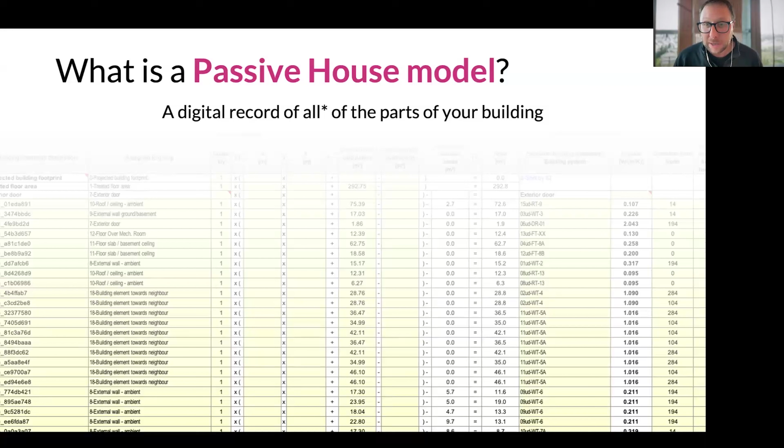So we're making a digital version of the building. We're going to take some real part of the building—a window, a door, a wall, a roof, whatever—and we're going to turn it into a set of numbers. And the reason we do that is so that we can figure out something useful about that thing.

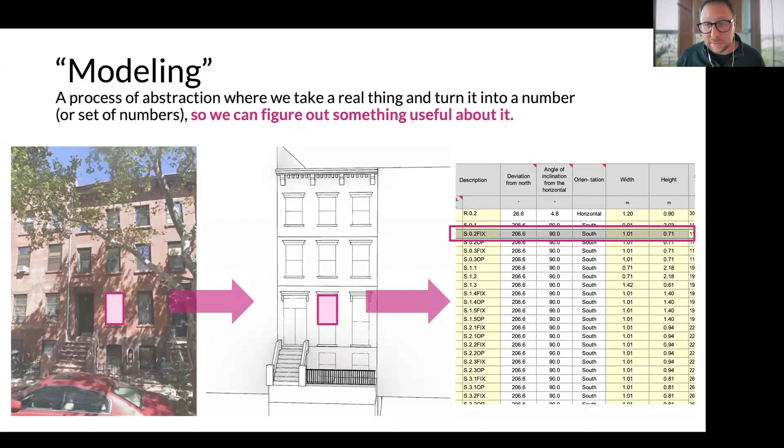So maybe we want to calculate energy performance. Maybe we want to look at thermal comfort. Maybe we want to look at condensation risk. Whatever it is, we're going to use that abstraction to determine something useful, something helpful about the building. And we do that so that we can make decisions. That's why we model these things, that's why we undertake this effort.

So when it comes to passive house modeling, we're talking about a few very specific types of models. In particular, during this talk, I'm going to be referring to what are known within the industry as PHPP and WUFI, or WUFI Passive. These are the two primary energy modeling or certification modeling platforms used in the passive house world.

PHPP stands for the Passive House Planning Package, and WUFI is just another piece of software. PHPP is used by the international certification, and WUFI is used by the US certification. So they're basically the same—they have some small differences, but for the most part, they're going to take in the same set of inputs, the same type of inputs, and yield the same type of outputs. So they're doing the same job functionally.

So what kind of things are we recording in these models?

Remember, when I use the word model, it's really just a recording. It's really just a counting of all the bits and pieces.

We're going to take in all the site information, the climate, the orientation, the shading, all your building's geometry, the size of everything, all the windows and doors, all those products and all their performance attributes, all the different assemblies, constructions, materials, and thermal bridges of your building.

And then, especially in non-residential or multifamily residential, things like usage schedules. When are people in the building? When are people not in the building? How many people are in the building? Things like hot water usage, as well as all the equipment and piping, heating and cooling equipment, ducting, and different elements, and fresh air ventilation systems and all their ducting and bits and pieces.

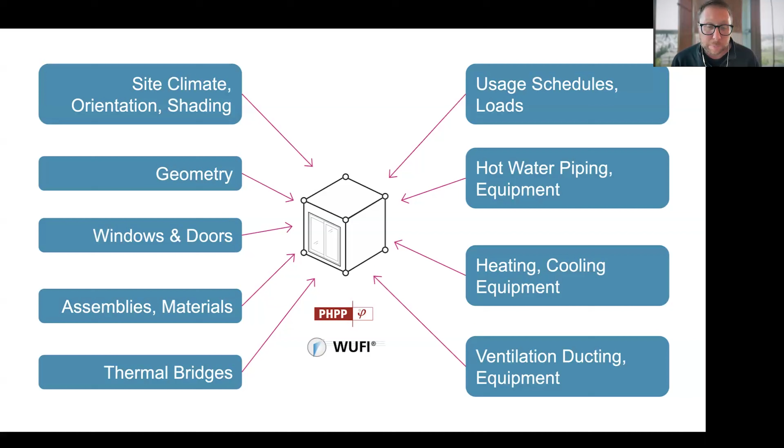There's nothing really magic here. It's really just about taking these real life things, a duct, a window, a door, and turning them into a set of numbers that we can input into these performance calculators, PHPP and WUFI Passive in this particular case.

Why are we doing that? The reason that we model is so that we can determine something useful, so we can answer a question. We don't just model because it's fun to make a digital version of our buildings. We model so that we can figure things out, so that we can determine something about our proposed design.

So we come into our models with a question: what is X? Because we might model for all sorts of different things. We might say, what is the peak load of my building? And I might want to know that so I can buy the right boiler, so I don't undersize it.

I might want to know the predicted thermal comfort of this very glassy room on the corner of my building. That might be an important thing that we would want to learn. We might want to model our buildings for the likely health outcomes of the occupants.

We might alternatively be interested, on the energy side, in things like how much money am I going to spend on energy over the course of a year. Or we might, as we do in Passive House world, be mostly focused on the quantity of energy we're going to use over the course of a year. We might model the kilowatt hours, or if you're in the US, the kBTU per year, the predicted energy consumption of the building.

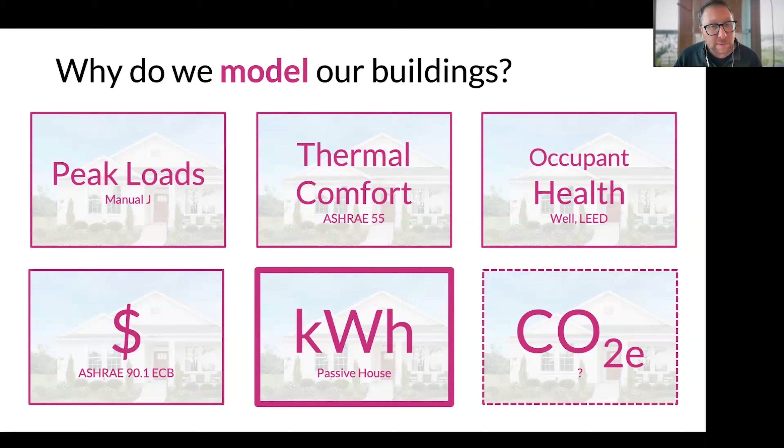Of course there might be all sorts of other things we might be interested in. One of the most common ones we hear from folks now is not so much around energy consumption per se, but moving towards a metric that measures carbon emissions or carbon equivalents, so tons of CO2 equivalent or kilograms of CO2 equivalent. There's all sorts of different things we might be asking our model to tell us about. The reason we want to know these things is so that we can make good decisions as designers and builders.

So specifically, what are our Passive House models telling us about? Our Passive House models are generally used to assess certifiability or certification. And when it comes to Passive House certification, we're going to be looking at primarily three different things: the heating and cooling energy demand.

We're going to be looking at the site energy consumption, which we might look at as a total site energy or a site energy per person. And then lastly, we'd be looking at the source or primary energy. Three different ways of looking at the energy consumption and performance of your building.

We would use these at different phases during construction or design to assess different bits of the building and look at how it's performing. But these three outputs are the key metrics we're looking at when it comes to certifiability in our Passive House models.

So we're going to input a whole bunch of stuff about the building, just recording all the things about it. And then the model or calculator is going to determine these values and tell them to us. Based on those results, we can then go make decisions - we can increase or decrease the insulation, we can change the windows.

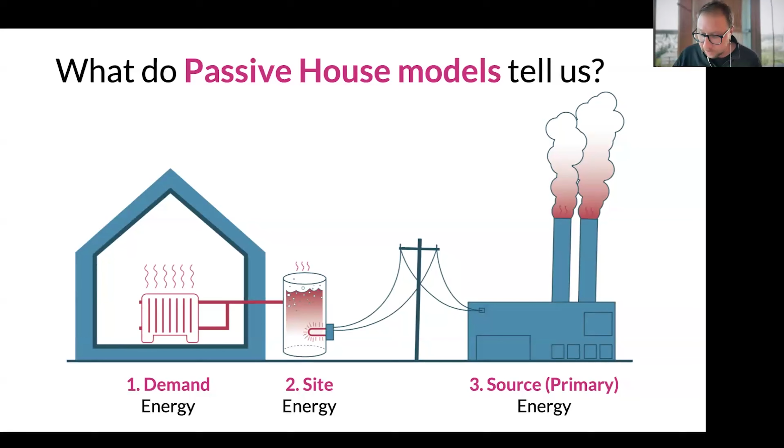We can rotate the building. We can take some design action based on these outcomes. That's the general idea about how these models function.

All right, so we're going to make these passive house models. So who exactly is it that's creating these passive house models?

Well, there's no rule necessarily about who executes or creates the passive house models. They could be made or executed by lots of different people as part of the design team. Maybe the most straightforward agent to create the model is the designer, the building designer themselves. The building designer is going to be the person who has the most knowledge about the project status and the different particulars of the building.

They would be able to iterate very quickly through lots of different options when it comes to the model and integrate the feedback from the model very directly into their design process.

Now, on the downside, the design team already have a lot of other responsibilities when it comes to project execution. On the other hand, they might not have very deep or nuanced knowledge about passive house protocols and rules in particular. The passive house protocols and standards have become much more complicated over the last 10 years than they were, let's say 25, 30 years ago. There's a lot of nuance to the various different rules and requirements, and it's very challenging for somebody who doesn't do it all day, every day, to be knowledgeable and sensitive to all of those nuances. So there's pluses and minuses to having the designer themselves do the work.

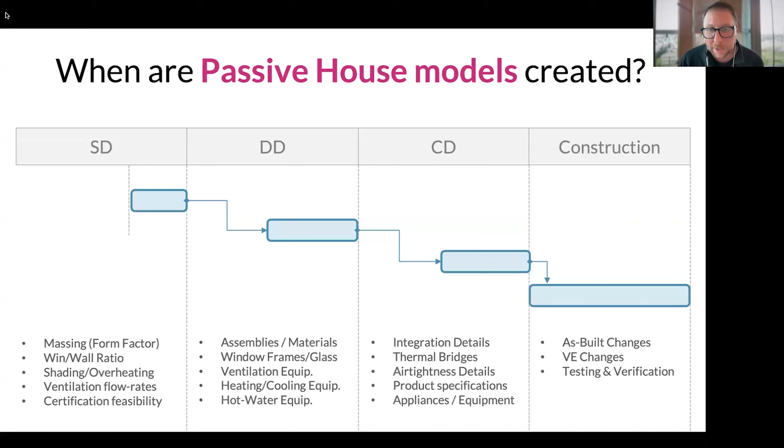One of the challenges when it comes to building these Passive House models is being able to execute early-phase models before all of the project specifications and details have been defined. It can often be very, very challenging. We'll talk about that in a bit.

So the conceit of this presentation was around how to maximize the value of these models. If you're doing a Passive House project, especially a certified one, you're going to be creating one of these models—a PHPP or a WUFI Passive model—you're going to have to do that for certification. But as I said, what we're seeing is that a lot of folks are spending a lot of time building these models. They're incredibly laborious and very difficult to create, but we're not getting enough out of them. We're not getting enough value from those models.

I'm going to define value in this case as the useful output over the effort input. And I'm going to define useful in this scenario as information or output that has a meaningful impact on the design of the building, and hence on the performance of the final building. So we want to increase the usefulness while decreasing the effort, and that will increase the overall model value. We'll talk a little bit about how I think we can do that—how can we increase usefulness, how can we reduce effort, how can we therefore increase the value of these models?

But first of all, who cares? Why does it matter? Why do we need to increase the value of these models? Why isn't good enough good enough? Well, from the design side, we need to improve our buildings' performance as a sector much more quickly, much more rapidly. We are currently far behind when it comes to achieving our climate goals in the building sector. We need to move much more rapidly, and we need actionable, accurate, useful information about our designs in order to be able to move quickly like that at scale.

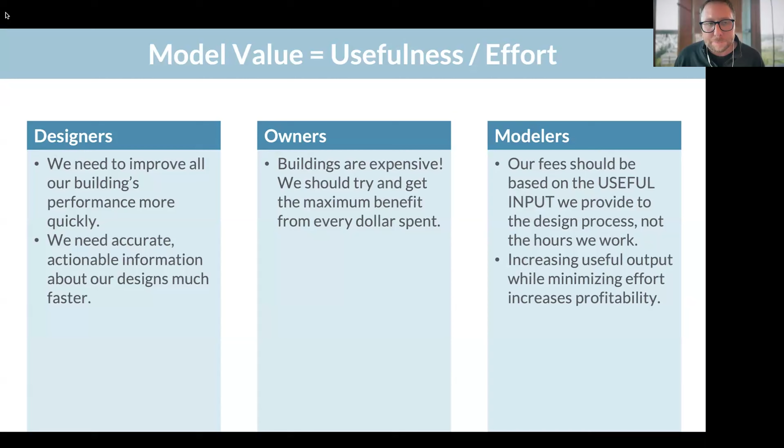Now, one thing I believe is also that model value is not a static value. It's not a single number. I actually think that the model value changes over time throughout the project. So rather than talking about model value as a single thing, we could talk about model value at any point in time along the sweep of the project - during the early stages, during the late stages, during the design phase, during the certification phase, what have you.

What we see in practice and in our own projects very commonly is that the model usefulness - and I'm defining usefulness here as yielding information that helps make the project better, not a very sophisticated definition, but like how useful is the model in making better buildings - that really peaks in the early stages of a project. So the usefulness, the utility of the model, the impact of the model, is greatest at the early stages.

And then it peters off to almost nothing towards the end. That's really just a function of how many decisions are made - not the model per se - but during the construction phase, most everything is decided. You have very few things left to change or revise. So no matter what the model says, it's not going to be able to drive too much. Of course, it's still important and does yield useful results, but there's just so few things to impact at the later stages that it becomes difficult. So the usefulness of the model sort of peaks early and then falls off.

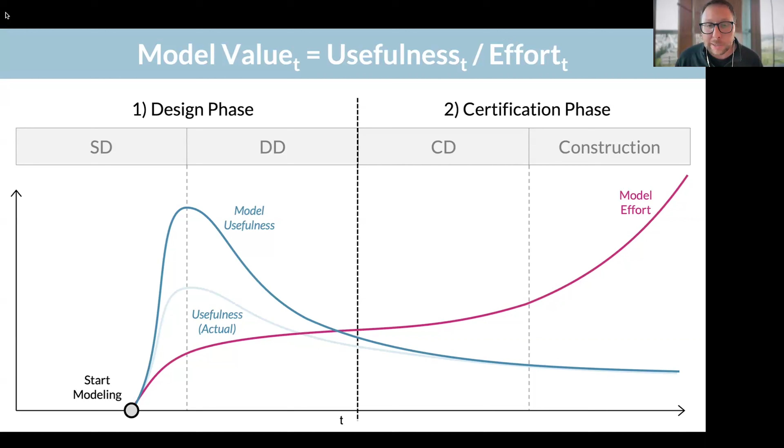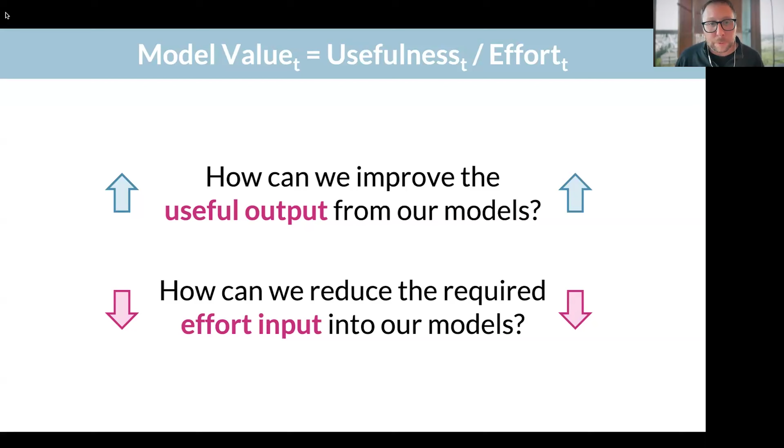So the question becomes, over the whole sweep of the project, how do we increase the useful output of all this modeling? We have to do this modeling for certification anyway, so how do we increase the impact on our buildings, and how do we reduce the effort required? Those two things together improve the overall value we get from the modeling process.

The first way I think we can increase usefulness - we'll talk about reducing effort in a minute - is by spending more time and focusing more energy on the early phase. Judging by that graph we showed before, model usefulness and utility really peaks at late SD, early DD phase. Moving more of our work into that part of the timeline will yield more useful results or impact on our building.

The difficulty, though, is that it's really hard to model useful performance models during this phase of a project. It's not hard because it requires a lot of hours - it actually doesn't take much time - but it requires a tremendous amount of experience and judgment. That's because during this phase, you have no idea what the project actually is.

None of the systems are defined, none of the walls or assemblies are defined, none of the products are specified. So you need to make good, sensible, conservative judgments and move forward, yielding useful information back to the design team even in the absence of that information. That's very difficult - not because it requires a lot of hours, but because it requires a lot of judgment, and much more experienced practitioners.

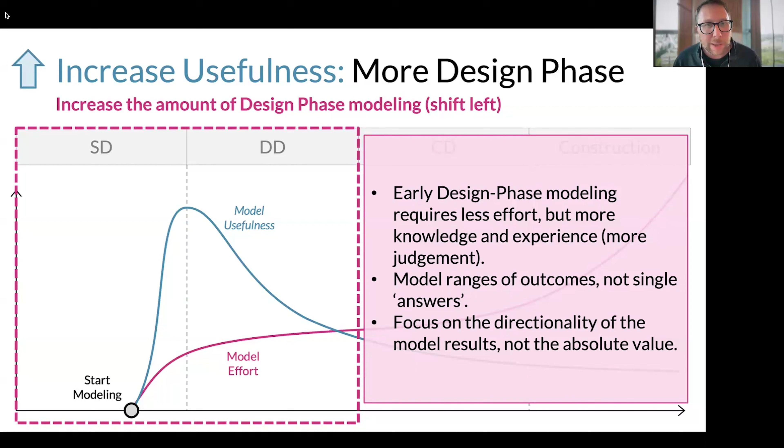But if we can move more of our work into this phase, we can radically increase the value of our modeling work. One thing we can do to increase overall value is, especially during this early design phase, never, ever be modeling just one version of your building. You should always be modeling a range of outcomes.

You should be modeling: here's the building if we built it to code minimum standards of insulation, airtightness, and mechanical systems. Here's the building if we added a little insulation and electrified all the systems. Here's the building if we improved airtightness and added an ERV. Here's the building if we added passive house windows.

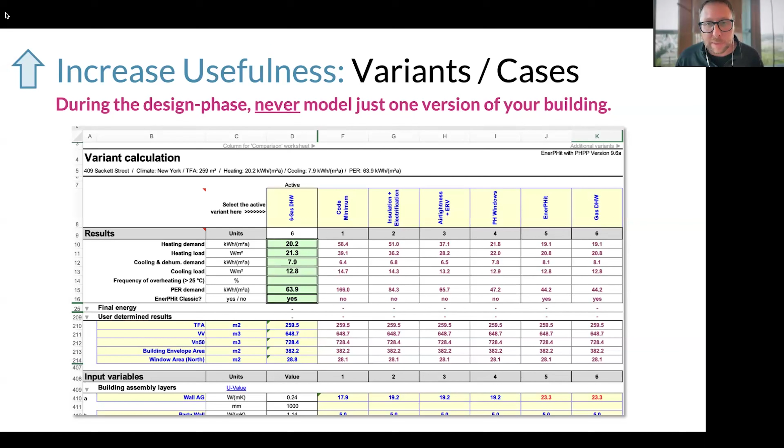Here's the building meeting a full EnerPHit or PHIUS Revive threshold target. So you're modeling a whole range of outcomes, and that range gives you a sensitivity around which elements are really impacting that particular building. It's going to differ for small versus big buildings, hot versus cold climates - it depends on the particulars of your building, but you should always look at a range of outcomes, never one option at a time.

So it's always about looking at options. This is an example of how we do that in some of our professional consulting projects - a little row house building in New York City. As a matter of course, during the late SD, early DD phase, we'll output at least 5 different versions of the building, showing tons of CO2 equivalent emissions per year based on different sectors: heating, cooling, domestic hot water.

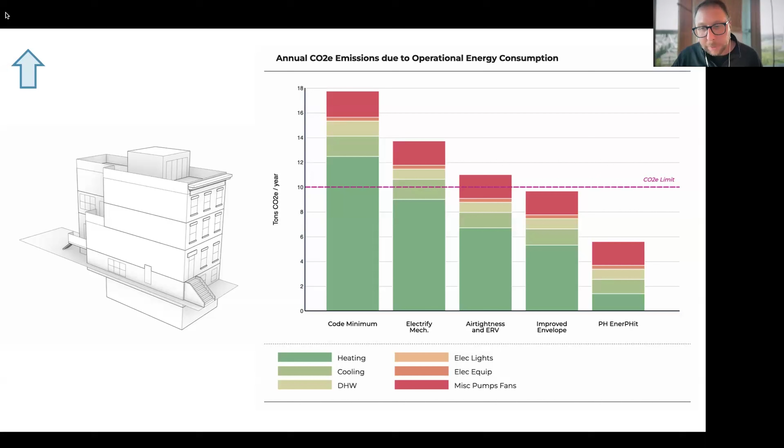You can see we're moving through 5 different versions of the building - in this case, code minimum on the left, and a passive house EnerPHit all the way on the right. We use this as a way to have a conversation with the design team about where the real levers are that impact overall building performance, and where we can leverage those to get the best, most cost-effective building.

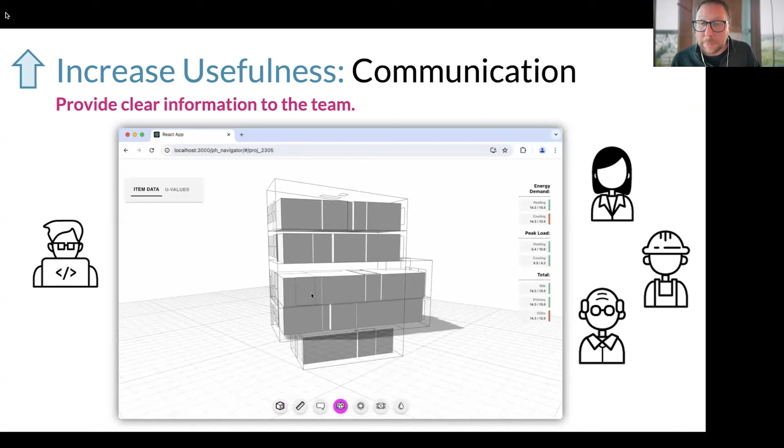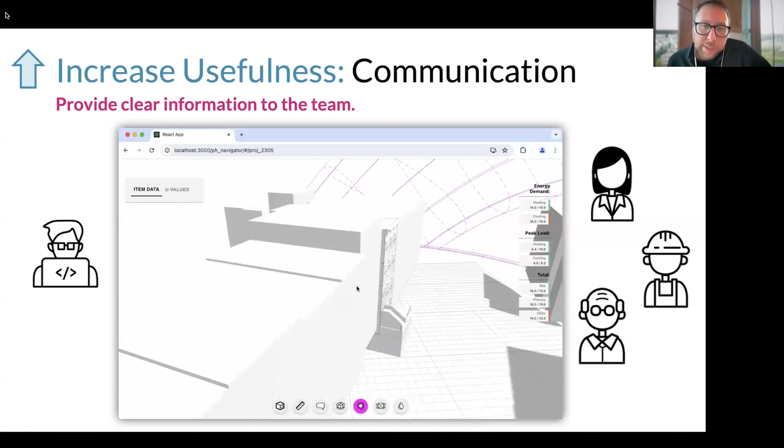One of the other things we need to do a much better job of as an industry, and certainly as a firm, is around communication. How do we communicate all this information to the rest of the design team? How do we keep the entire team in the loop as we're building out these complex building performance models? What you're looking at here is a prototype application we created to visualize passive house models in the web browser.

This is a shareable link that we can provide to the entire design team, allowing the user in their web browser to go in and interact with, query, and look at the various elements of the Passive House building, from windows and walls to rooms to, in this case, plumbing and piping.

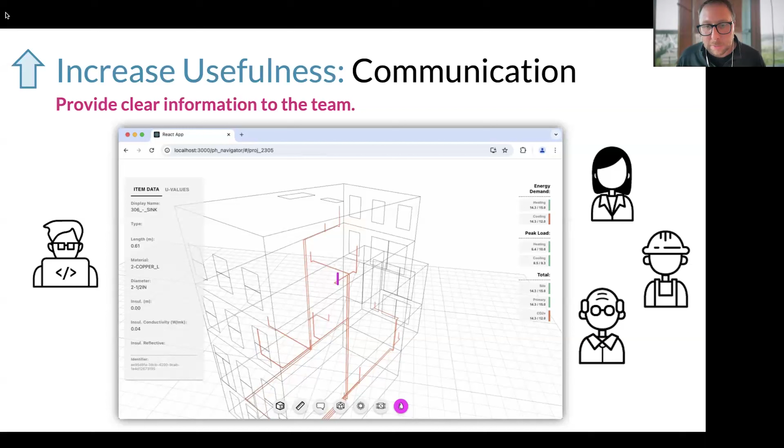This is particularly useful if you're trying to get coordination across the entire design team about what it is that you're modeling. What is the status of the model? What is built in? What is not built in? What are the assumptions? Making sure you're making that transparent to the entire design team, communicating that information rapidly, in essentially near real time.

So working on those communication methods is very important. One of the things we need to work on is how we say things, how we write things. You should never, ever use jargon. You should never say KBTU per square foot per year to somebody. You know the square footage of your client's building—do the math and just say KBTU. You can make everything much easier for the people digesting it. Avoid jargon wherever possible; just say things straightforwardly.

In this case, the bulkhead appears to be unshaded and exposed to high summer radiation—radiation, that's maybe a little jargony, maybe you could say that a little better. But use straightforward, actionable statements to communicate to the design team things you think they should do in order to improve the performance of the building. So work hard on your communication, both on the visual side, the conceptual side, and the writing side. It's very important.

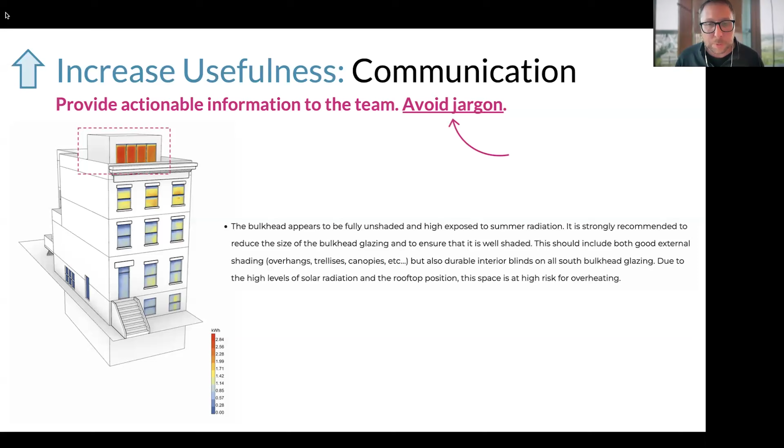Now, on the other side, when we talk about usefulness, that begs the question: who are we? Who is defining useful? Who are these Passive House models useful to? I've sort of taken as a default that we're talking about the design and construction team. The Passive House models have a direct use for the design and construction team.

They help you make decisions—should we build this or should we build that? Should I buy this or should I buy that? That's a very direct use of the Passive House models. So when we talk about usefulness over effort, that's primarily who I'm thinking of when coming up with that equation. But of course, Passive House models—or Passive House certification—have an indirect benefit to other stakeholders that are part of the project team.

Especially the owners, and in particular the residents. The Passive House models can and do have an indirect benefit on those stakeholders.

And then there's a whole other group—we don't want to call them stakeholders necessarily, they're not really part of the project team—but other entities that may benefit from the Passive House certification or modeling. Those might be government or policymakers who benefit from having rich data sets or accurate energy models, academics and researchers who likewise benefit from accurate energy models, maintenance and operations teams who benefit from having digital information models of their buildings, quantity takeoff estimators, and other simulators.

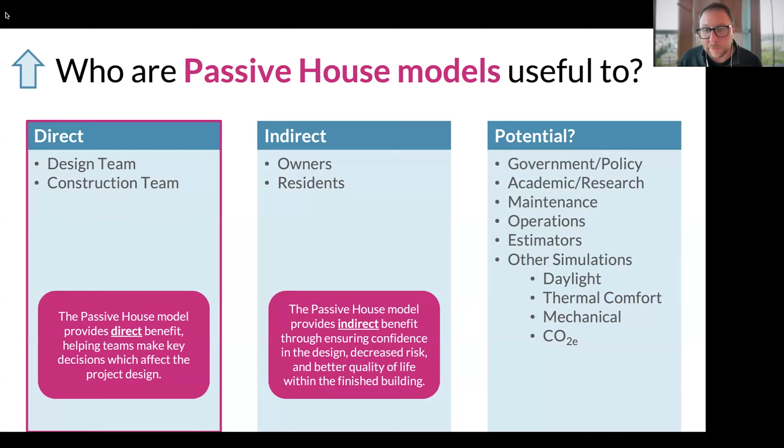If you're working on big projects required to do LEED certification, can you double up the usefulness of your building model to do your daylighting assessment, mechanical assessment for peak loads? Are there other ways you can increase the use of these models you are creating? If we're able to do that, or figure out some additional uses for those models, especially towards the tail end, we could potentially bend the usefulness curve to gain more use, especially in the later stages.

And if we go back to my proposition that as modelers, as design teams, we should be paid for the value we create, not the hours we work, then increasing the value towards the last half of the phase here could have real implications when it comes to overall project profitability.

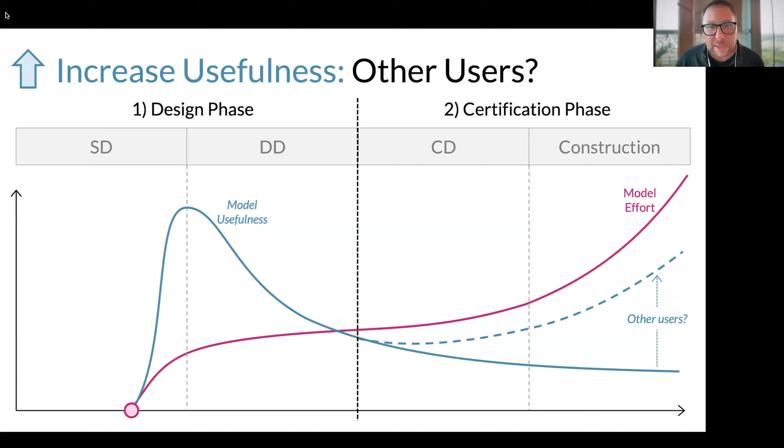That is all sort of things to think about, let's just say, we'll call it that way. Those are not things we've successfully been able to monetize yet, but they hold potential. They are potential revenue streams for the future. So let's just call it that.

Taking a slight step back, one of the potential places that your models might be really valuable is to other team members. There's a bunch of reasons why that doesn't work very well right now, but preview of coming attractions.

Next week we're going to talk about improving your passive house modeling from a more technical perspective. If we can change, upgrade, and overhaul our passive house modeling tools, we can definitely move to a scenario where the passive house model data is able to flow in and out of other calculators, which could mean opening up new revenue sources for modeling or design teams, or decreasing costs at the very least.

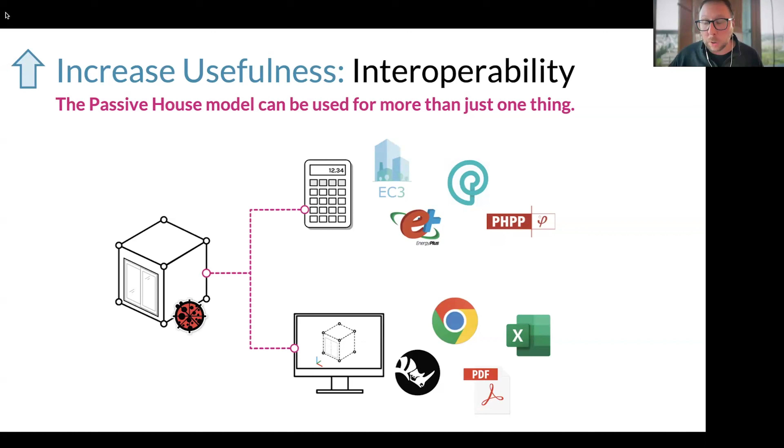If you're able to move your single model through a quantity takeoff assessment, an embodied carbon calculation, an hourly calculation, and an annual or certification calculation, if you're able to view it in a web browser and on your desktop application, and view the same data in a dashboard presented to the developer, being able to use the model in multiple ways depending on who you're talking to or what you're working on is one way to increase the value of our models.

On the flip side of increasing usefulness, one of the things we can do is increase the usefulness of our models for sure. But we should also be working hard to reduce the effort we put into them. To say it again, I do not believe we should be paid for the number of hours we work. We should be paid for the value that we create.

So stop working so many hours. Stop working so hard. Use better software. Use better tools to execute and output the same high quality model at a fraction of the time.

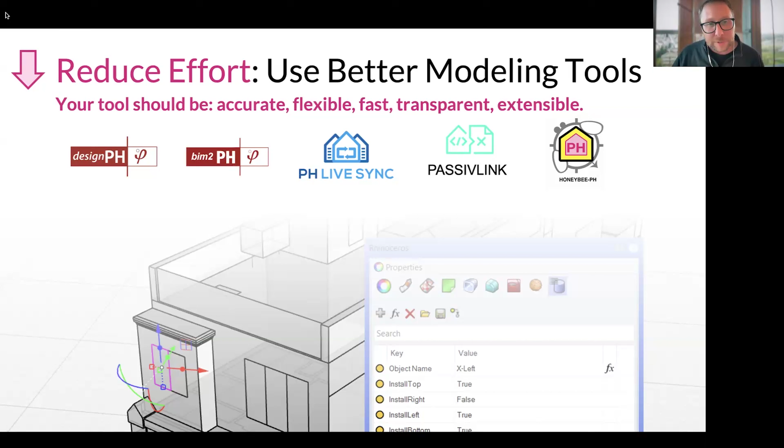If you're working on a multifamily passive house building, you should not ever be entering model data by hand. You should be using a better tool, one of the building information modeling interfaces, some sort of 3D modeling application. You should be using PH LiveSync or PassiveLink or Honeybee-PH, or maybe bim2PH or designPH. Somehow you should be using a highly automated and more efficient tool to harvest that data and get it into your passive house models. That can pay enormous dividends when assessing the time component for your projects.

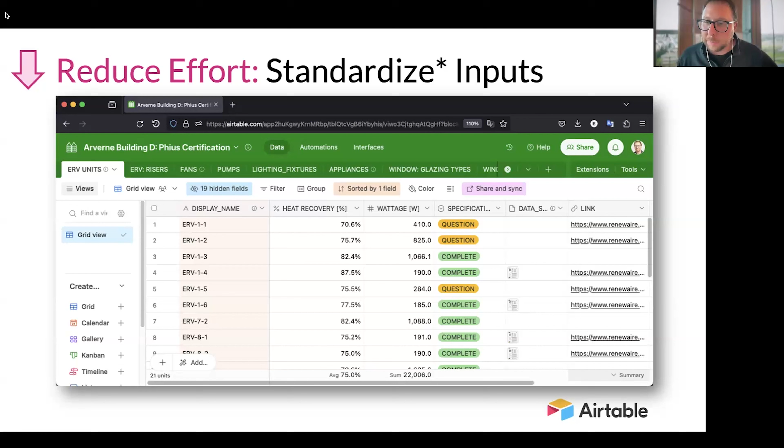On that front, one of the other things you can do is standardize your inputs. Don't reinvent the wheel every time you come onto one of these projects. In our office, we've landed on a standardization of inputs strategy where we use a cloud-based database to manage all the project data, and then connect that to our passive house models. We've built out a whole bunch of software to allow us to do that, which means the inputs are relatively standardized, so we can move through data organization and input verification and cleaning very, very quickly.

Brief aside, when I say standardize, I don't mean try and make catalogs. You'll never be able to capture all the variety of things out there. Certainly build up your internal catalogs of the 10 window types you commonly use, but what I really mean by standardize inputs is standardize the structure and behavior of the data so your model can anticipate how the data comes in, not what the data is, but how it's organized and how it works. So when we talk about standardization, I don't mean you're only allowed to use 5 different windows. What I mean is windows should always be structured the same, they should behave the same, they should have the same attributes and fields, and your model should be able to read that in an automated way.

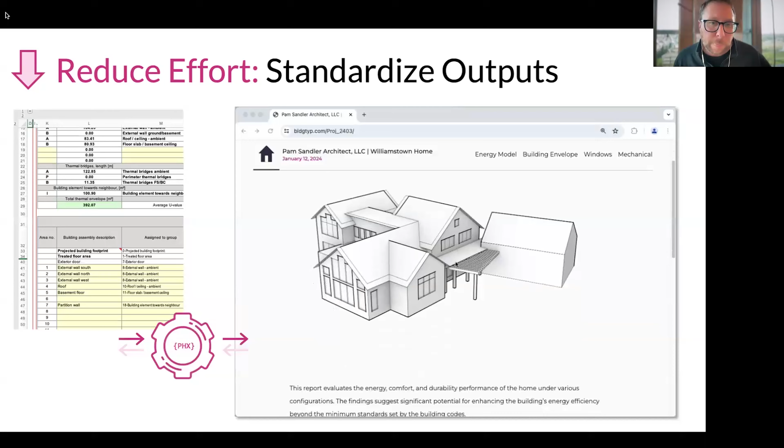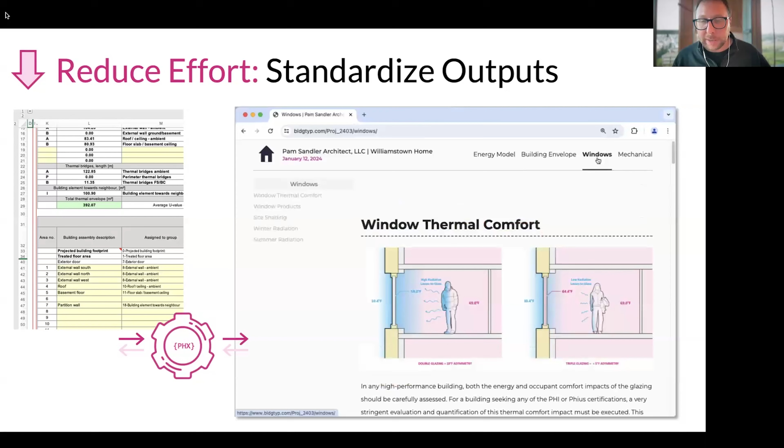Now, at the same time we're automating or standardizing the inputs to our models, we're going to standardize the outputs. What you're looking at here is a project web page we create for a client. So if a client comes to us and says, we want to get passive house certification during the late SD, early DD, we would do an assessment model like this, and then deliver back to them an interactive web page like this that has all the product recommendations and assessments of their particular building.

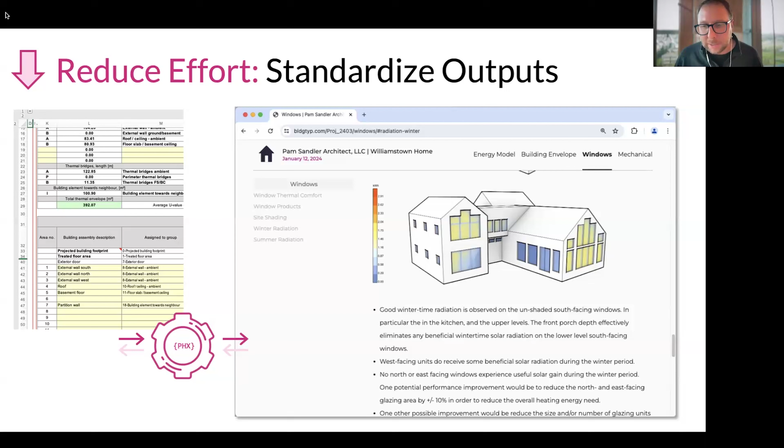The important piece here is to understand that this web page is very automated. The graphics, the structure, and the graphing are all automated. We're able to, through software tools, connect our passive house models directly to these web pages, and the data flows from one to the other, so we can move through those outputs very quickly.

From a high level, this is a long way of saying that we need to automate and invest in tools. We need to invest in our tooling. The problem here isn't specific to Passive House. Passive House suffers from it, but we need to address it as an industry.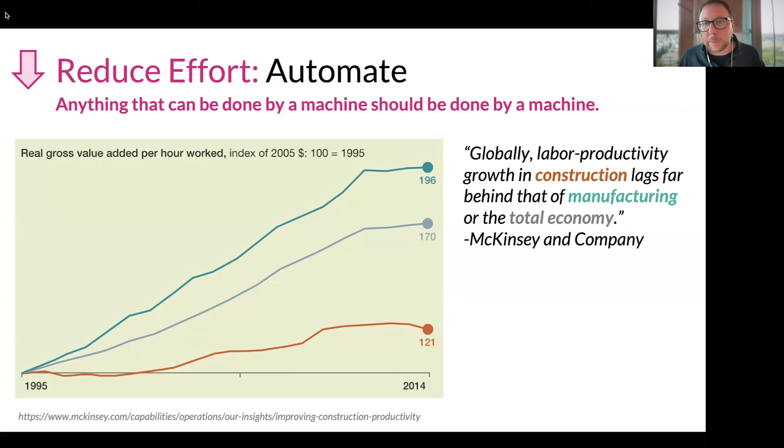The overall problem within the AEC industry is that we have not invested enough in automation and software solutions. We know that globally, the construction and AEC sector lags far behind other industries in overall productivity, and a lot of that comes back to the lack of investment in automation and tooling versus other industries. So we have a lot of ground to make up as a sector when it comes to improving productivity and processes, and of course the Passive House world is no exception. We suffer from the same issues.

Let's finish up here with just a few things, I'll try to save some time. I'm keeping an eye on the clock. So let's talk about a few early phase modeling tips, some straightforward recommendations, and then we'll save time for chatting and questions.

As I indicated earlier, I think one of the main ways we can increase usefulness is by shifting a lot of our work to the early phase of a project. But it's really hard to model a Passive House project during late SD, early DD, when so much of the building is still undefined. How can you yield any useful results back to the team? How can you say anything with any comfort or definitiveness about the project when it's all still so blurry and mushy?

Well, there's a couple things you can do. First, keep your focus on the right things: model SD things during SD, DD things during DD, and CD things during CD. Do not get lost in the weeds trying to calculate every last thermal bridge during the SD phase, when you know so many things are still going to change.

That said, we do want to capture a lot of those unknowns. Anytime we have unknowns in a process or project, that means we have some risk, and we deal with risk by building in excess capacity. There's nothing revolutionary there, nothing unique about Passive House in that regard. We build in excess capacity and safety factors anytime we have unknowns and risk, and that's how we manage that risk.

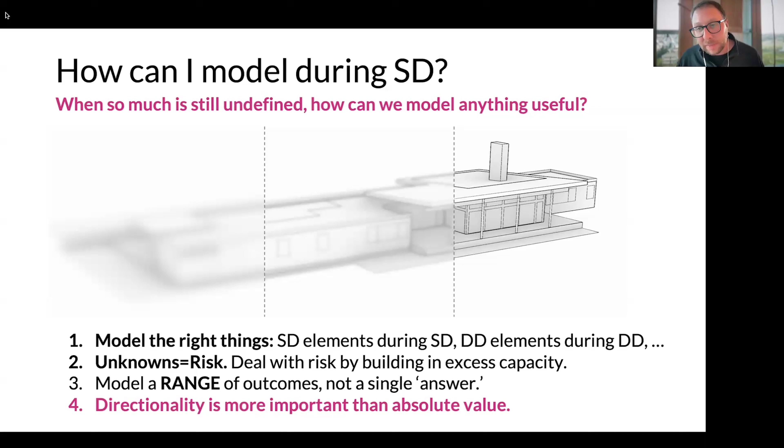As we talked about before, we're not going to model a single answer. We're going to model a range of outcomes, and you're going to focus not so much on the absolute value of the result, but on the trend: if I do this, is it better or worse than it was before? That's the kind of thing we're going to look at during these early phases.

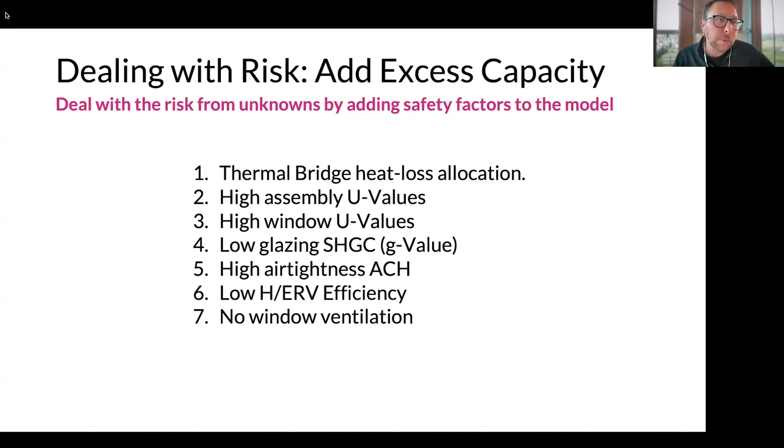From a practical perspective, how can we deal with risk by adding this excess capacity into our models? There are about seven things I think you can do to your energy models to build in extra contingency. I'd love to hear if anybody has other tricks they commonly use to manage this early phase modeling risk.

One of the first things I'd recommend is to build in an allocation for thermal bridge heat loss. This is during early SD, late DD, when you have no idea what the building systems are or what the details look like yet. Fine—don't get lost spending a ton of hours modeling a bunch of thermal bridges that don't matter and that are going to change later on.

Instead, just use an allocation. Say, okay, during SD there's going to be an extra 10% heat loss due to thermal bridges in our building. That's going to be very pessimistic—hopefully you'll get that down to 2%, 5%, or maybe 0%, and if so, good for you. But if not, you've built in a lot of excess capacity, an allocation for the thermal bridges that you then spend down later during the design phase.

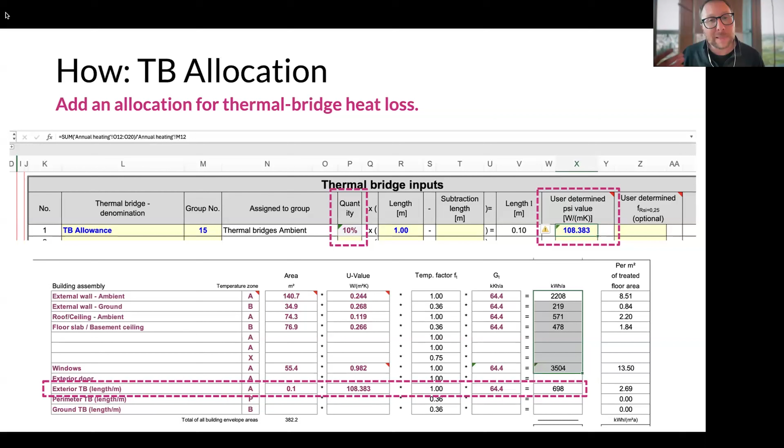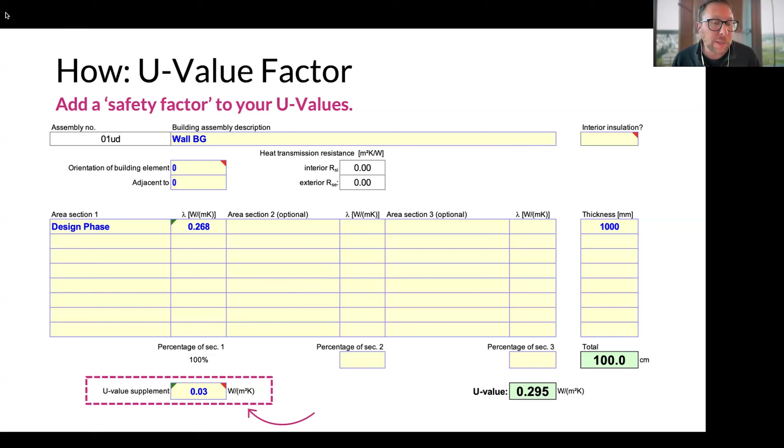Another thing you can do is add a safety factor to your U values. You can very easily add a quick safety factor, maybe a 5% or 10% increase in U value. One way or another, you want to boost the U values of your project assemblies a little bit in order to build in some of this excess capacity.

When it comes to windows, one of the easiest things you can do during the early phase, long before you have any clue what window products will be used, is use one of the various window thermal comfort calculators available, whether Phius or PHI. Both have maximum U values allowable for certified projects. So in the early phases, if you don't know anything else about your project windows, go ahead and use that maximum U value window. That's the maximum allowable window that meets the thermal comfort targets. Just use that one during SD, unless somebody says we're going to use this other product. That'll be a good conservative solution. You'll only ever do better than that. You could never do worse, because then you wouldn't be able to certify the project.

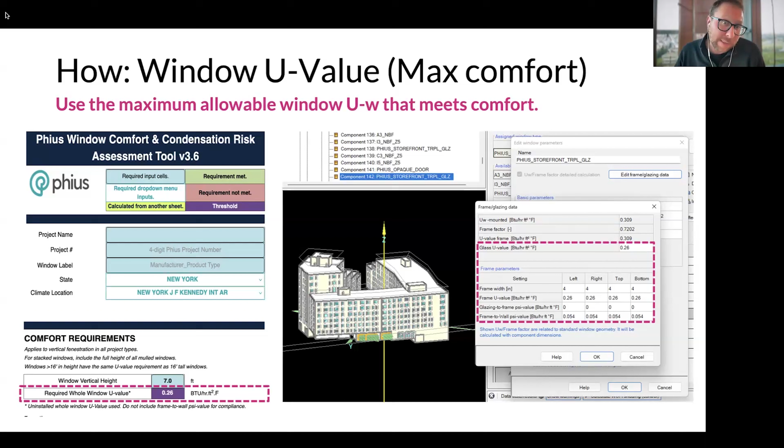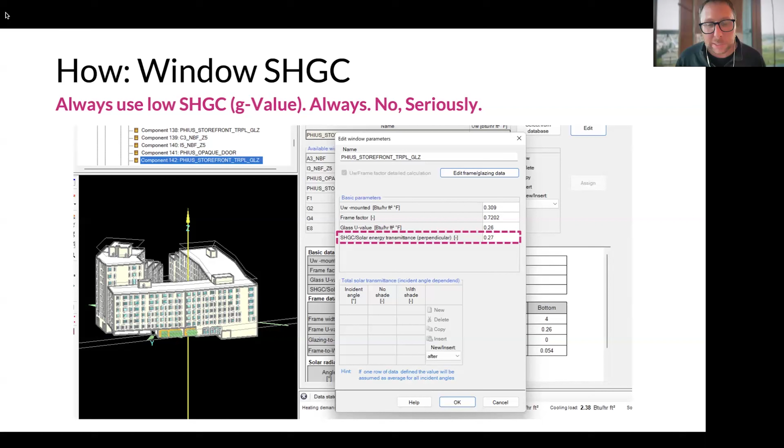When it comes to windows as well, on the SHGC side, always use low SHGC. I mean that for real. Don't go down the dangerous slippery slope of including high solar heat gain glazing. It may make your model look good, but it's a bad idea in almost every climate and for almost every building we've ever worked on. My strong recommendation is do not get tempted by that easy fix of using high gain glass. It's going to have bad outcomes for your building. So use low gain glass if you're working in North America.

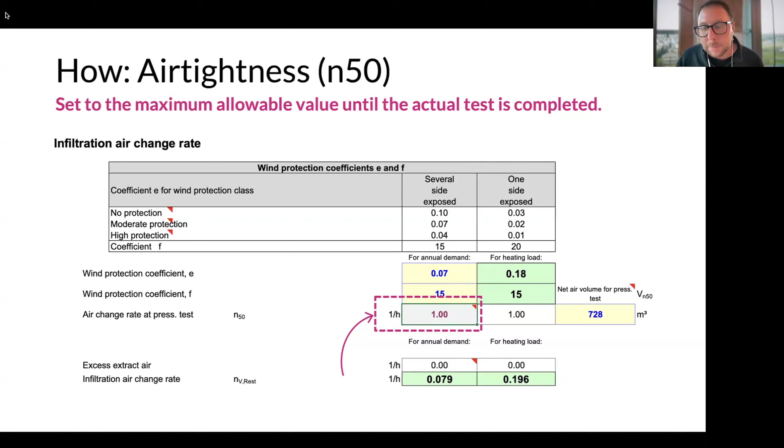Use the highest allowable air tightness in your model. You could input any value you want. You could say during design phase that my construction team is amazing, they're going to get to 0.001 ACH, and enter that in the model. But you've now yoked your construction team to a really unrealistic expectation. So one of the things we always do is use the maximum allowable air tightness in the model until the building is actually tested, so you can only ever do better than that number. It might be an EnerPHit project at 1 ACH, maybe new construction at 0.6, maybe a PHIUS project at one of its various air tightness targets. But use the maximum allowable air tightness value for your infiltration.

And then lastly, for the ERV, use the worst allowable performance, which in PHI world would be 75% in a cool climate like New York City. It'll be slightly climate dependent, but use the worst allowable performance that still meets your comfort targets. Use comfort as the backstop on your overall building.

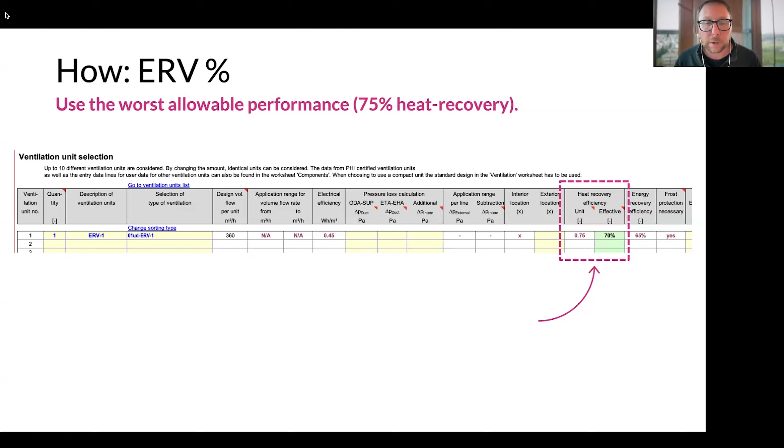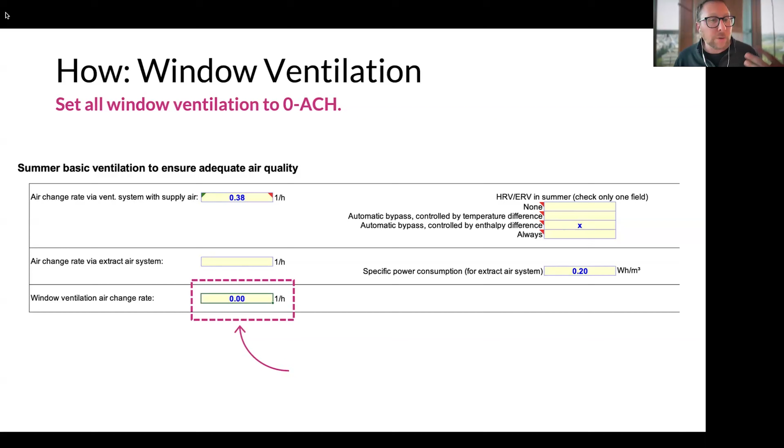So you can absolutely build these things in from the very beginning, which means you can get started long before you know anything about the particular specifications of the project. The very last bit here, required for PHIUS but also good practice for PHI, is do not include window ventilation air change—just leave it set at 0. That also gives you a false sense of security on overall cooling energy consumption, so leave that set to a very conservative estimate during the modeling phase. If you build in all of these contingencies into your model during the early phase, you should have a lot of confidence that you can yield useful results back to your design team, helping them shape the project without worrying about what-ifs later on, or spending too much time modeling details that don't matter during that early phase. So we can build in a lot of those contingencies there.